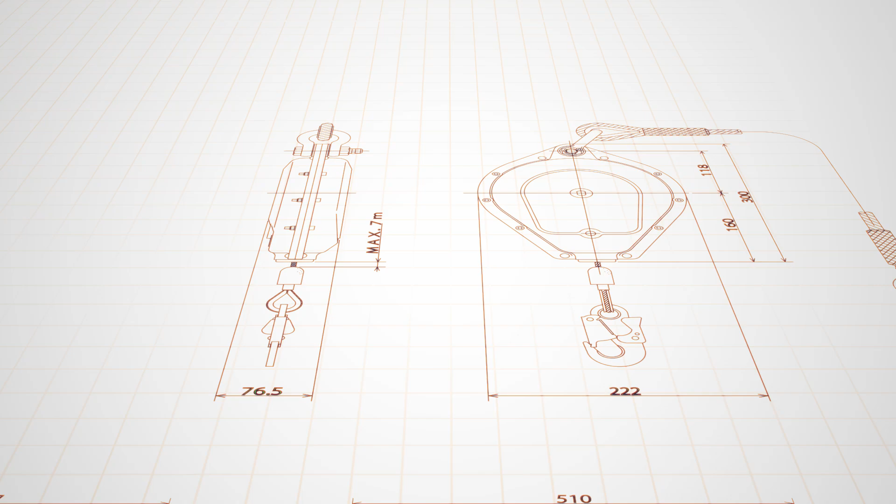Through decades of change, we have shaped a resilient spirit, challenging adversity. Guided by this spirit, we have continued to create niche industrial products, like spring balancers and cable reels, designed, developed, and manufactured entirely in-house to meet our customers' unmet needs, all in pursuit of uncompromising quality.

Our manufacturing philosophy goes back to the early 1900s, to Matsujiro Endo, a master of hammered copperware. In Tsubame, where the craft flourished, Matsujiro, the second generation of Shogakudo, refined his skills, earning acclaim for his exceptional techniques, innovative ideas, and elegant designs.

In 1914, when the production of Western-style metal cutlery began to take off in Tsubame, Matsujiro shifted his focus from copperware to Western-style cutlery and established Endo Matsujiro Shoten, the predecessor of Endo Kogyo.

He was a pioneer introducing machinery and initiating mass production of tea saucers using a manual press. With the establishment of the Tsubame Cutlery Industry Association and the beginning of a strategic partnership with Mitsui & Company, Matsujiro continued to demonstrate his outstanding leadership guiding the business.

In 1935, Endo Matsujiro Shoten was reborn as Endo Kogyo Company Limited, aiming to expand exports of Western cutlery to Europe. However, the outbreak of World War II soon disrupted this vision. As Japan's economy shifted toward military production, manufacturing cutlery became impossible.

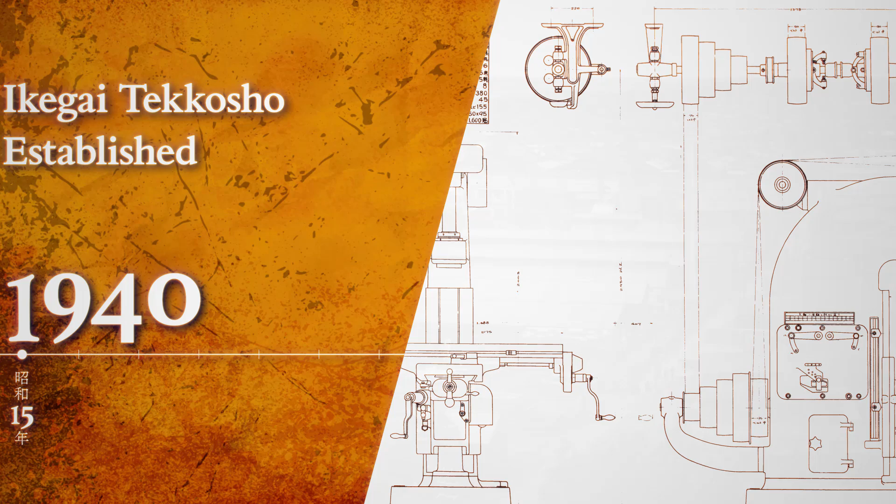Despite these early challenges, and with support from companies like Ikegai Tekkosho, Endo Kogyo began manufacturing lathes and milling machines. After the war, Endo Kogyo was designated a reparations factory and forced to suspend operations for 7 years.

Matsujiro Endo passed away suddenly at the age of 68. His legacy was carried forward by Sangemon Tano, a close friend and key contributor to Endo Kogyo's founding. A new era had begun.

What is the future for Endo Kogyo? As the reparations designation was lifted, Endo Kogyo searched for a new direction. One day, an engineer discovered a drawing of a circular saw cutting machine made by Komatsu Limited.

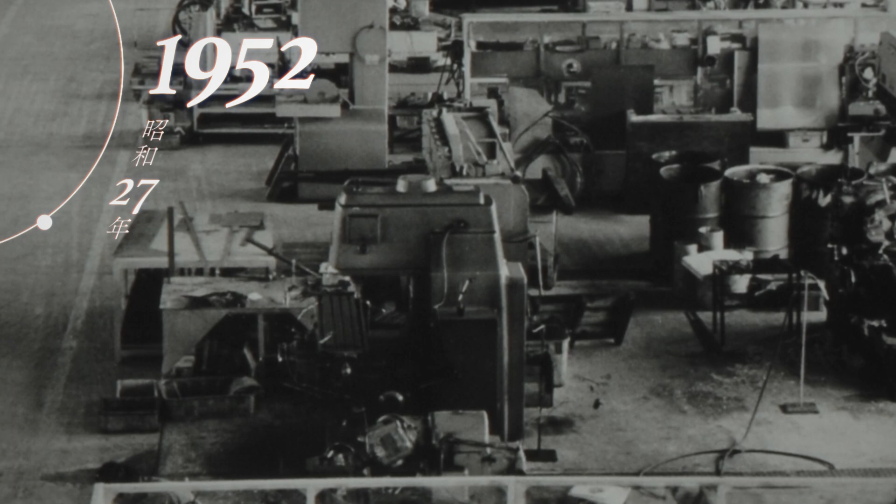Inspired, the team decided to produce it themselves. The production of circular saw cutting machines progressed, which soon expanded to include rail cutting machines for the national railways.

Then, in 1954, alongside this development, Endo Kogyo introduced our flagship product, the spring balancer. It gained popularity among domestic automotive manufacturers, capturing over 90% of the domestic market. Yet, financial challenges persisted.

At age 43, Mutsuo Endo became president. Around 1970, the Nixon shock and the strong yen caused exports of Western cutlery to plummet, once again placing Endo Kogyo in a difficult position.

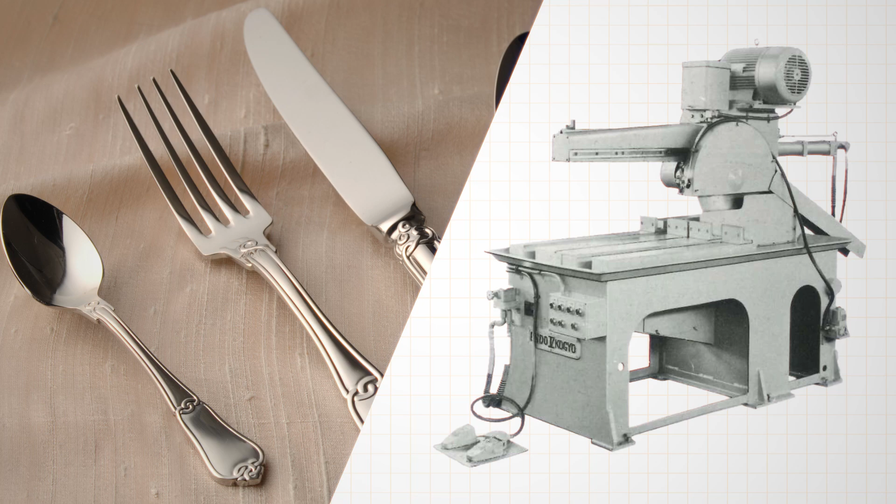In search of stability amid economic turbulence, Mutsuo turned his sights to a new venture, one that could ensure consistent production beyond the volatility of Western cutlery and cutting machines. He often said, small and medium-sized companies must compete in niche markets. Combine several niches to build a strong business.

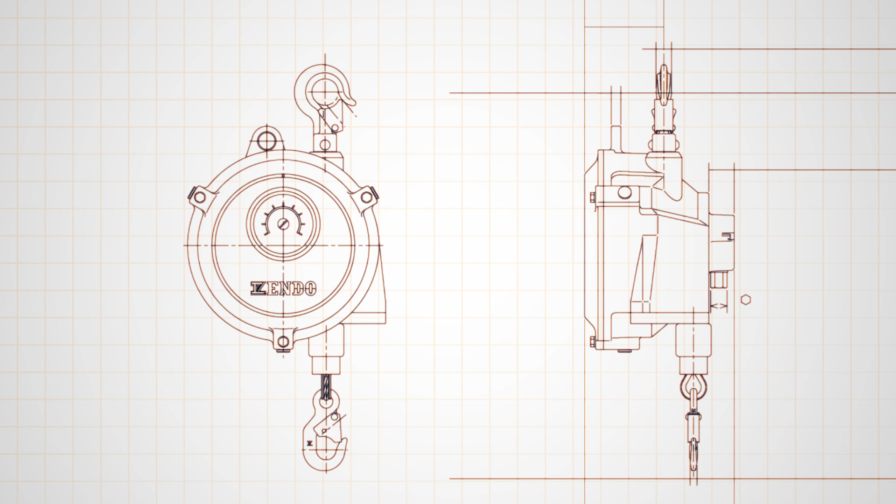Endo Kogyo possessed the expertise to design and manufacture balancers, a niche success that laid the foundation for developing innovative new products: air hoists, cable reels, hose reels, motorized reels, and self-locks. In 1985, Endo Kogyo celebrated its 50th anniversary with a new headquarters building.

Performing well in Japan's bubble economy, Endo Kogyo achieved record sales and profits, thriving once again by mastering niche markets. In 1993, leadership passed from Mutsuo Endo to his son, Koroku.

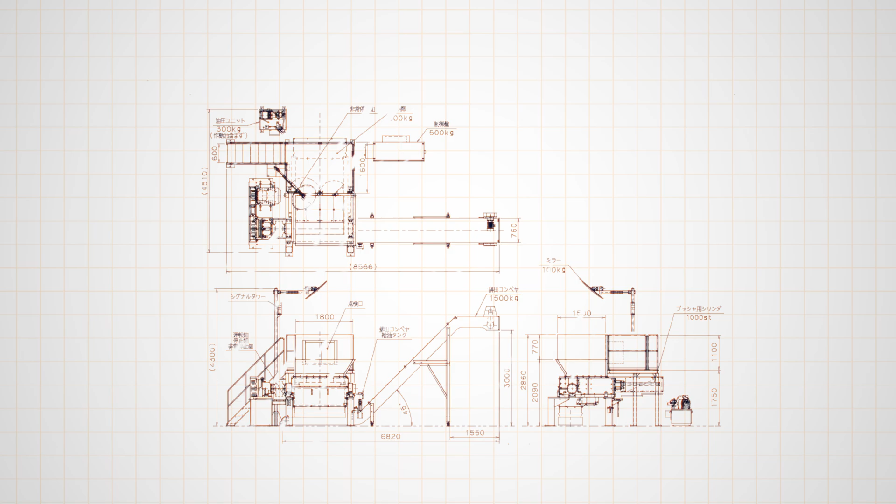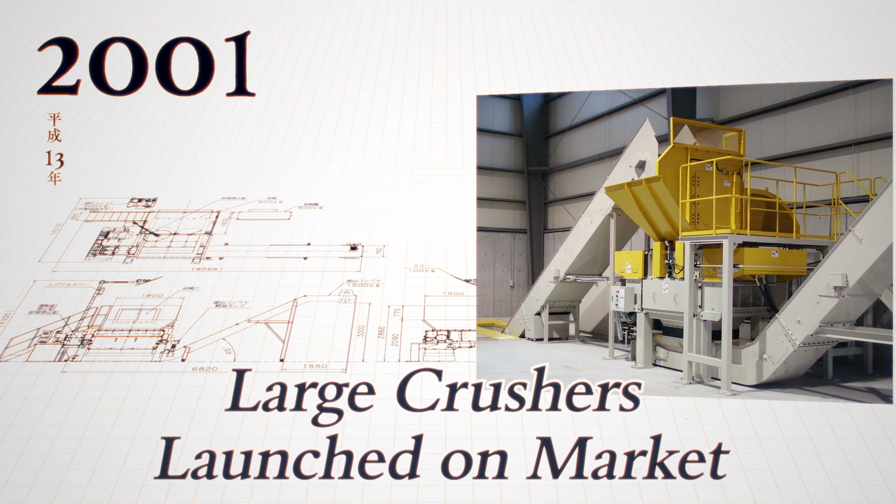Inspired by customer conversations, Koroku developed a crusher in 1995, a new business to replace circular saw cutting machines. Soon, ENDO KOGYO began full-scale sales of large crushers for recycling plants. From small to large machines, ENDO KOGYO built a full lineup to meet diverse customer needs.

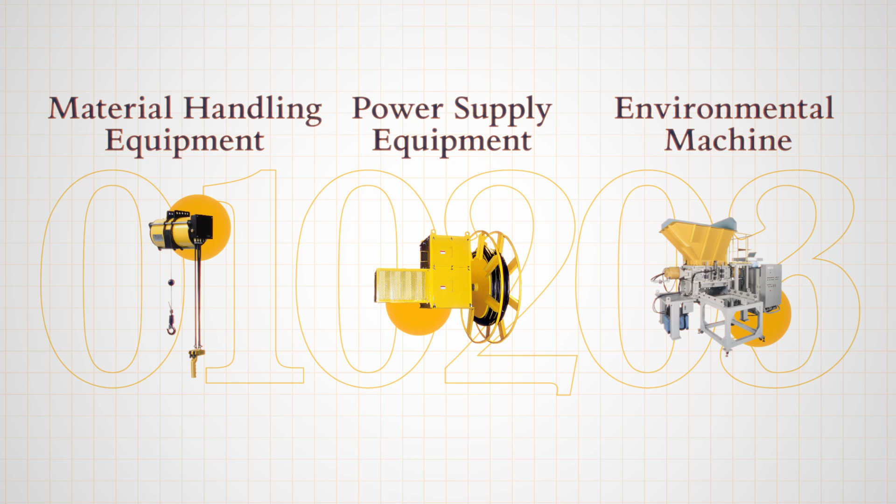Looking ahead, ENDO KOGYO reorganized into 3 divisions, each with its own strategy and product development plan. To become a globally recognized top manufacturer, ENDO KOGYO strengthened overseas sales of spring balancers and air hoists starting in the early 1990s, beginning from Southeast Asia.

We launched knockdown production of spring balancers at United Faith in China. We established ENDO KOGYO India in Pune, India. We established ENDO KOGYO Shanghai in China.

With our ability to develop products that meet the needs of the times and our cultivated technical expertise, we now export to 57 countries and regions. ENDO KOGYO is now known around the world as ENDO for quality.

Today, ENDO KOGYO is embracing new challenges in 3 key areas: material handling equipment, power supply equipment, and environmental machine, all while keeping pace with a rapidly changing world.

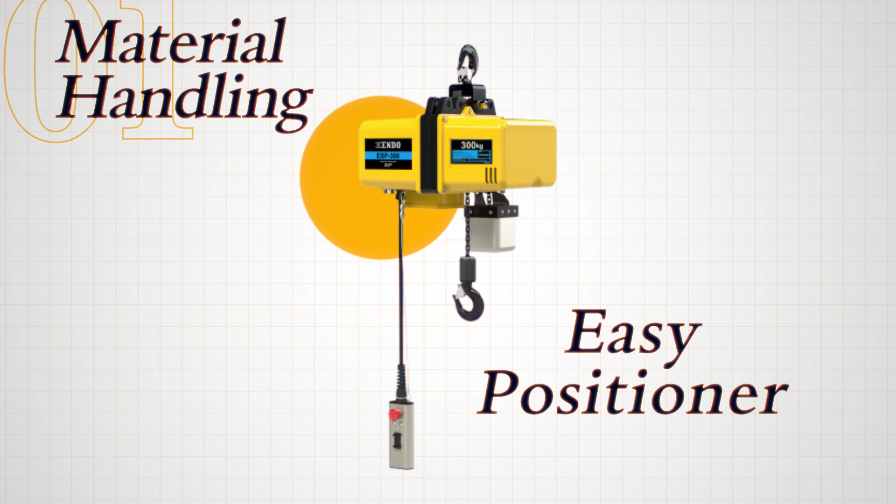In the material handling division, we've developed the Smart Balancer series, integrating electronic control into traditional balancers. As labor shortages intensify at manufacturing sites, we're offering advanced handling solutions to reduce reliance on manual labor. To meet rising demand for safer workplaces, with no suspended overhead equipment, we're also developing mobile lift balancers that can be easily moved around the workspace.

In the power supply division, we've created a reel specifically designed for land-based power supply systems at ports, now expanding globally from the port of Los Angeles. This initiative helps reduce carbon dioxide emissions from docked ships, contributing to the goal of reducing carbon emissions. Anticipating the rise of renewable energy and electric vehicles, we're also responding to diverse power supply needs across industries.

In the environmental machine division, we provide crushers and molding machines for biomass applications. By integrating IoT technology to boost productivity, we are reducing energy consumption. As a dedicated environmental machinery manufacturer, we continue to take on the challenge of realizing a sustainable circular society.

In 2025, Koroku Endo stepped down as president, and his son Takashi Endo assumed leadership as the new president.

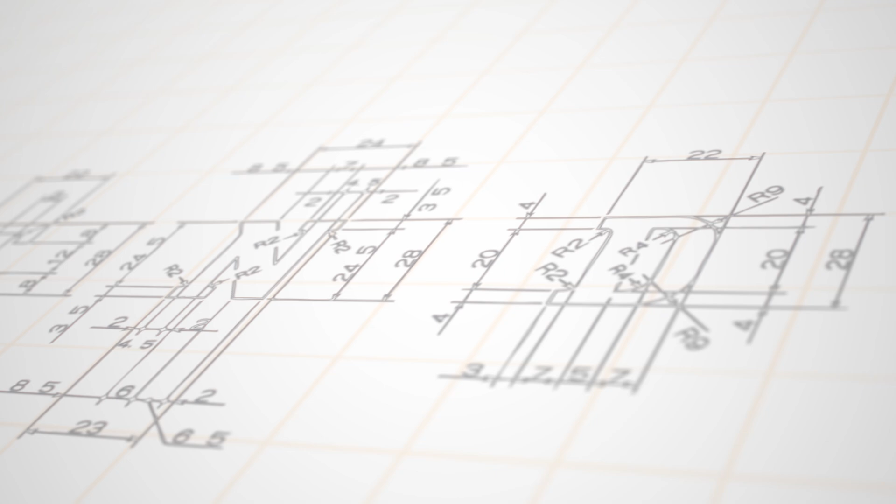Never stop, keep evolving toward a better future. With the spirit passed down since our founding and our unwavering technical expertise, we aim to become the global leader in niche markets.

At Kanayama Shrine in Tsubame, Niigata, there is a poem composed by Matsujiro. Let us learn from the wisdom and achievements of our ancestors and pave the way for future generations.